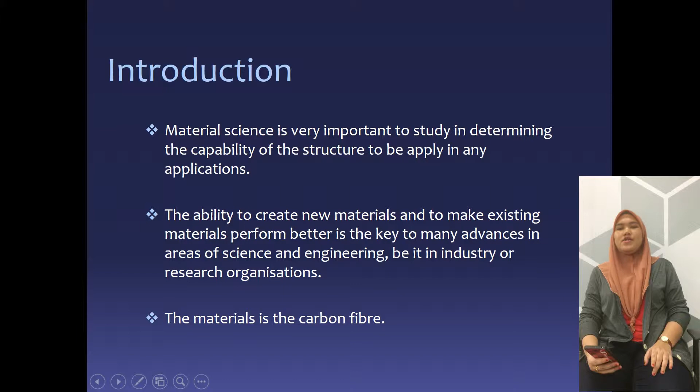For the details on carbon fiber, my friends will explain more about it.

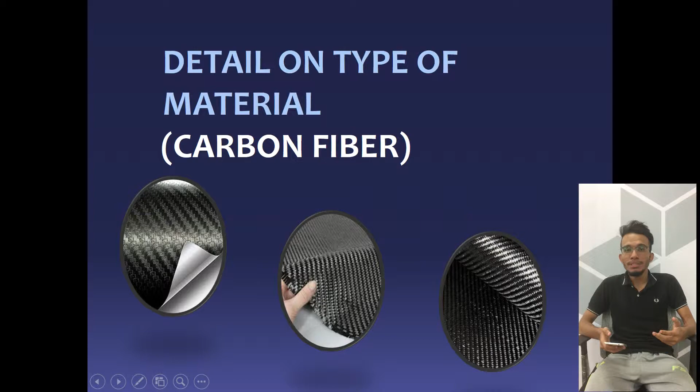Now I will present the details on the type of material, which is carbon fiber.

Firstly, we will look at the composite material. Carbon fiber is a long and thin strand of material in diameter, mostly composed of carbon atoms. The carbon atoms are strongly bound in microscopic crystals that align parallel to the axis of the fiber. This arrangement of atoms makes the fiber strong.

Several thousand carbon fibers are twisted together to form a yarn, which may be used by itself or woven into a fabric. This composite material is produced by combining yarn or fabric with epoxy and winding it into a shape.

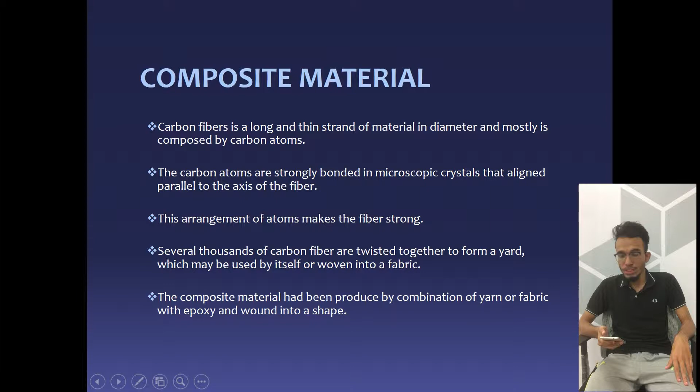There are some applications of carbon fiber reinforced composite material, such as aircraft, spacecraft, racing car bodies, golf club shafts, bicycle frames, fishing rods, automobile springs, sailboat masts, and many other components where lightweight and high strength are needed.

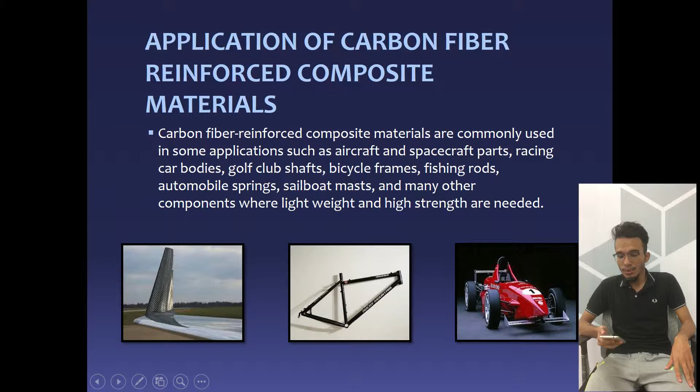Next is the raw material of carbon fiber. Carbon fiber has its own raw material, called the precursor. Polyacrylonitrile is the main material in the composition of making carbon fiber, making up 90% of carbon fiber.

The remaining 10% is made from petroleum pitch or rayon. All of these materials are characterized as long strings of organic polymer molecules that are bonded together by carbon atoms.

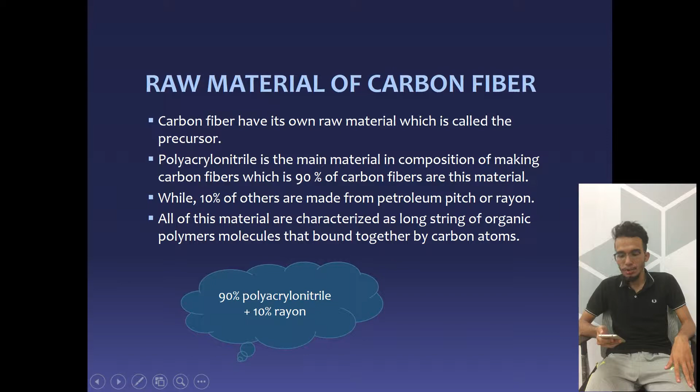Lastly is the manufacturing process of carbon fiber. Chemical and mechanical processes are involved in making carbon fiber. Firstly, the precursor is drawn into long strands. Then it is heated to a very high temperature without any contact with oxygen.

The fiber cannot be burned in the absence of oxygen. Instead, the high temperature causes the carbon atoms in the fiber to vibrate until non-carbon atoms are expelled. Carbonization takes place in this process, leaving a fiber composed of long, tightly interlocked chains of carbon atoms with only a few non-carbon atoms remaining.

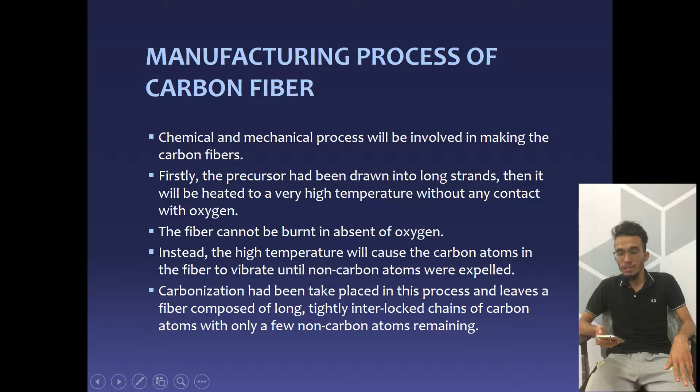The first physical property is that carbon fiber has a high strength to weight ratio, meaning carbon fiber can have good mechanical properties. It can have high resistance to breaking but has low weight. Because of these properties, carbon fiber is suitable for a lot of applications.

One example is suitable for aircraft application. An aircraft needs high strength in order to withstand high pressure and force at high amplitude and high speed, but it also needs low weight in order to reduce cost and reduce the power needed to fly the aircraft.

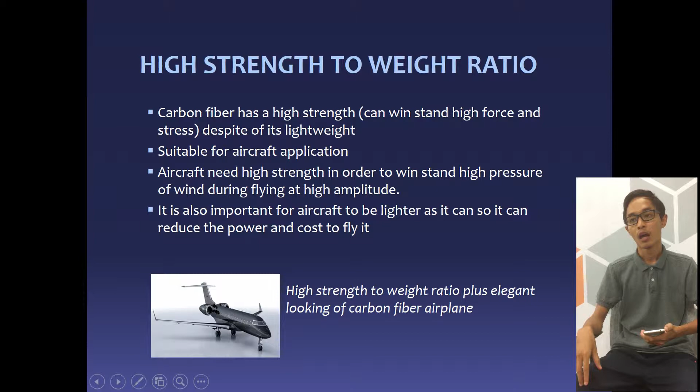The second physical property is that carbon fiber is corrosion resistant and chemically stable, meaning carbon fiber can resist the damage caused by oxidation and chemical reactions.

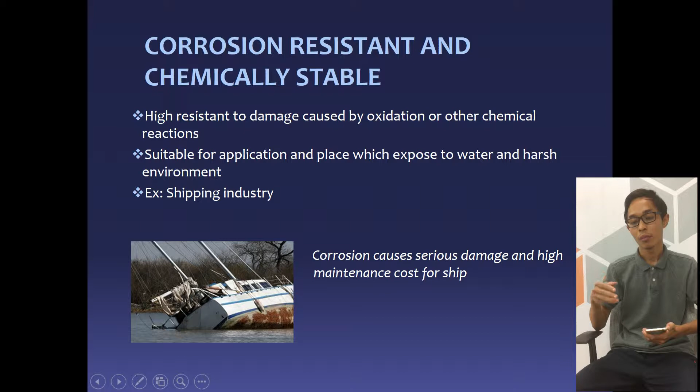Because of this, carbon fiber is suitable for applications exposed to harsh environments and water, such as the shipping industry. In the shipping industry, corrosion causes a lot of maintenance and costs a huge amount.

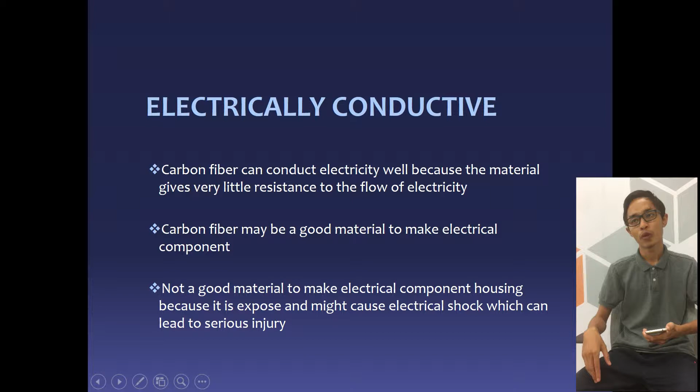The third physical property is that carbon fiber is electrically conductive. Carbon fiber has low resistance when electricity flows, and because of this, carbon fiber is suitable for producing electrical components.

Next, carbon fiber is a fire resistant material. Carbon fiber may be oxidized if exposed to high heat in the presence of fuel burning, but the flame does not continue once the flame and fuel are removed.

With this heat fire resistance, carbon fiber is suitable for applications exposed to fire, such as products used in the kitchen and firefighter equipment.

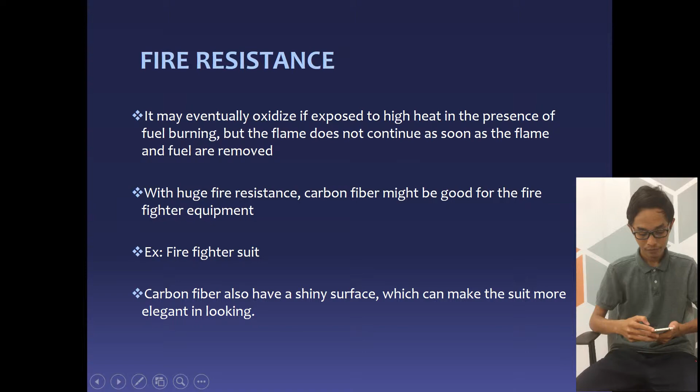Next, carbon fiber has a low coefficient of thermal expansion. Thermal expansion is a measure of the extent to which a material expands or contracts when exposed to high or low temperature. Because of this, carbon fiber is suitable for applications that are critical to small movement, such as optical machinery like telescopes and microscopes.

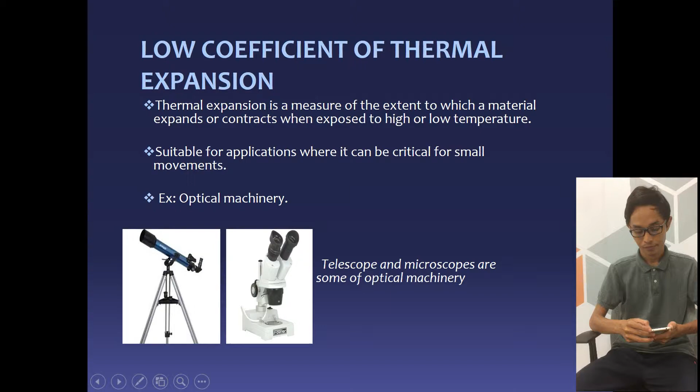The last one is carbon fiber is non-poisonous. Because of this, carbon fiber is suitable for applications in medicine. For example, in broken bone cases, usually metal is used in order to support the part that is broken.

But metal has high risk because metal can corrode and give chemical reactions that may harm the human. Carbon fiber, however, is non-poisonous, lightweight, and highly corrosion resistant, making it a perfect alternative to solve this problem.

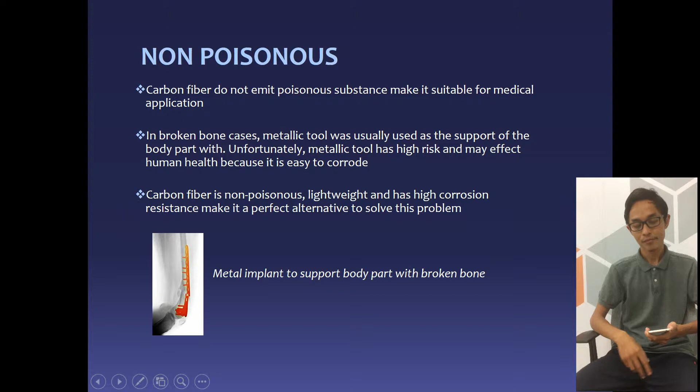As you see on the left hand side, the figure shows the illustration of the layer structure of carbon fiber. The layer structure consists of 6 layers, and in each layer, carbon bundles are arranged in 0 and 90 degree directions, woven together.

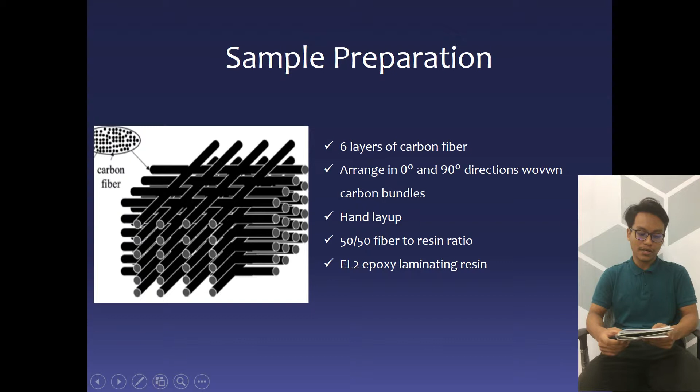The composition of resin matrix and fiber ratio is 50%, and the resin matrix used in this fabrication process is EL2 epoxy laminating resin. Hand layup is used for this fabrication process.

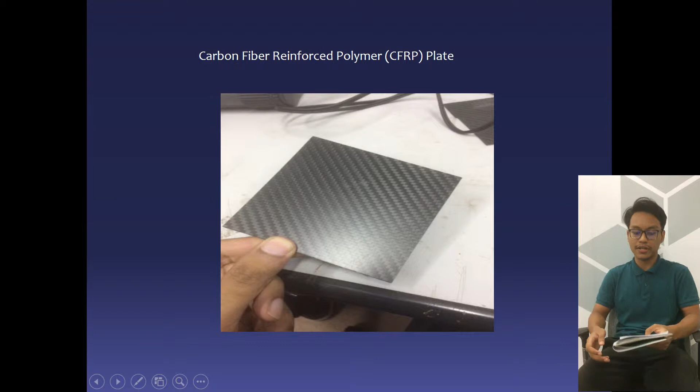Next, this figure shows the sample preparation for the tensile test. The overall length of the sample is 250 mm, the width is 25 mm, and the thickness is 1.5 mm.

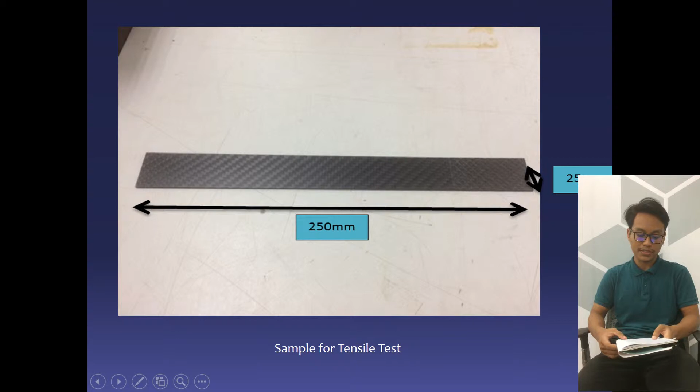There are 5 samples that had been prepared before performing the tensile test, to get a mean average value more accurately.

Next, this is the figure of the tensile test machine that we use to determine the mechanical properties of the carbon fiber.

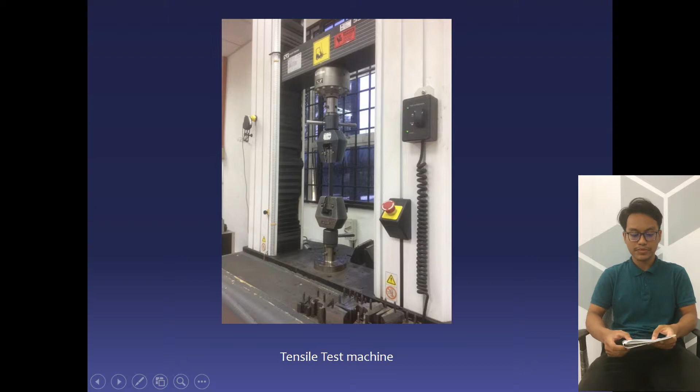Next, this is the graph of load versus extension that we get from the tensile test. As we can see, the maximum load that carbon fiber can withstand is about 30000 Newton and above.

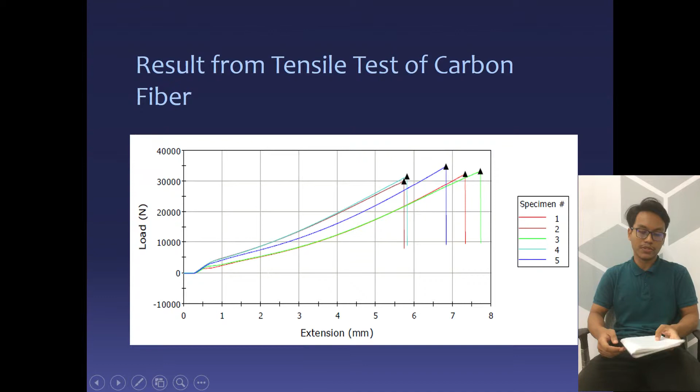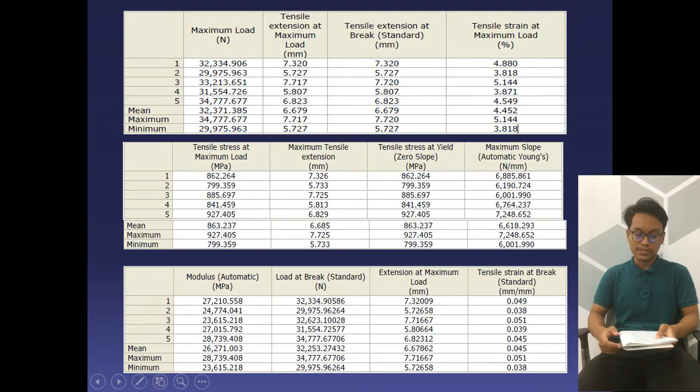Next, this table also shows the overall data that we obtained from the tensile test, such as tensile stress at maximum load and modulus of elasticity of the sample.

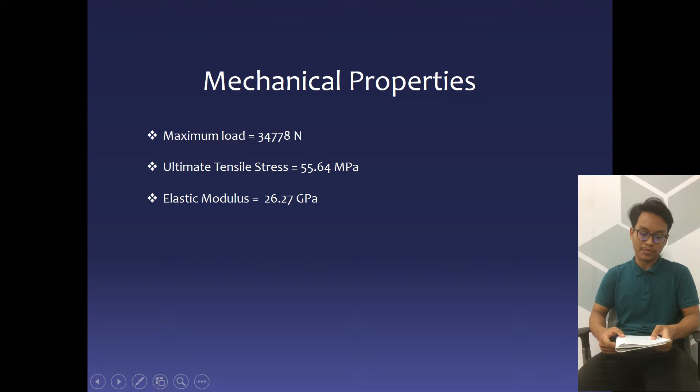In the end of this experiment, we have calculated the value of the maximum load is about 34,778 Newton, 55.64 megapascal for ultimate tensile strength, and 26.27 gigapascal for modulus of elasticity.

Lastly, this is the microstructure of the carbon fiber that have been captured from SEM. That's all from me, thank you.

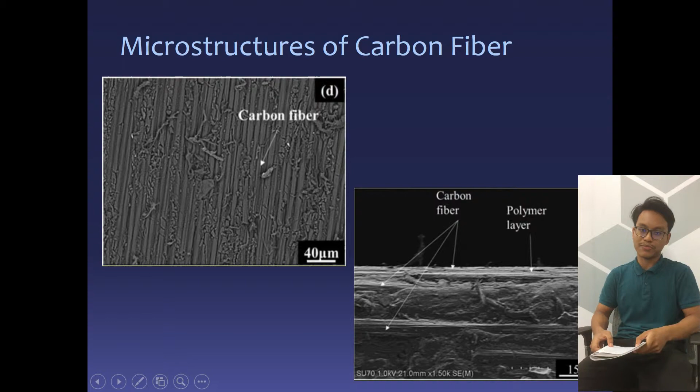Firstly, we must know the raw material of carbon fiber. Carbon fiber is made up of organic polymer. It is made up of a long chain bonding of carbon atoms.

Carbon fiber contains two parts, which are the matrix part and reinforcement part. The reinforcement part is the carbon itself, and the matrix part comes from nylon, epoxy, or polyester.

Most carbon fiber is made up through the polyacrylonitrile process. Other than that, it may come from rayon or petroleum pitch process.

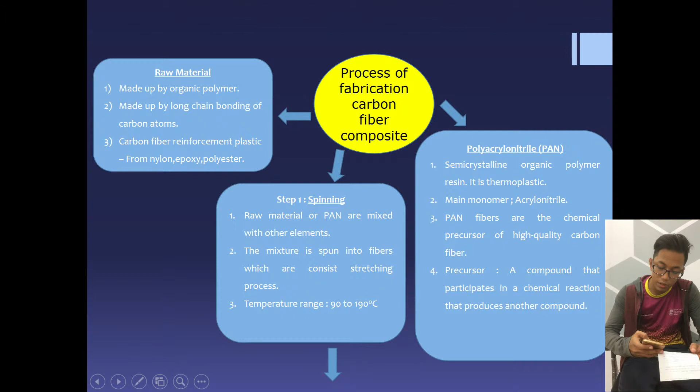The PAN process uses a semi-crystalline organic polymer resin. It is thermoplastic, and its monomer is acrylonitrile. PAN fibers are the chemical precursor of high-quality carbon fiber.

What is a precursor? A precursor is a compound that participates in a chemical reaction that produces another compound. There are 5 basic processes in order to fabricate carbon fiber.

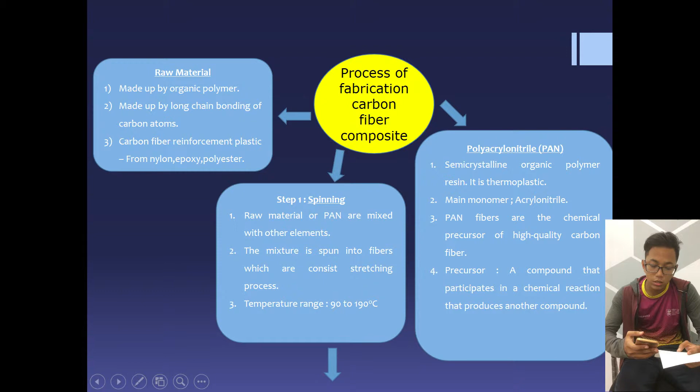For step 1, spinning: the raw material, or PAN, is mixed with other elements. The mixture is spun into fibers, which involves a stretching process. The temperature range is from 90 to 190 degrees Celsius.

Next, for step 2, which is stabilizing: it is a chemical alteration or oxidative stabilization. The purpose is to stabilize the bonding chain.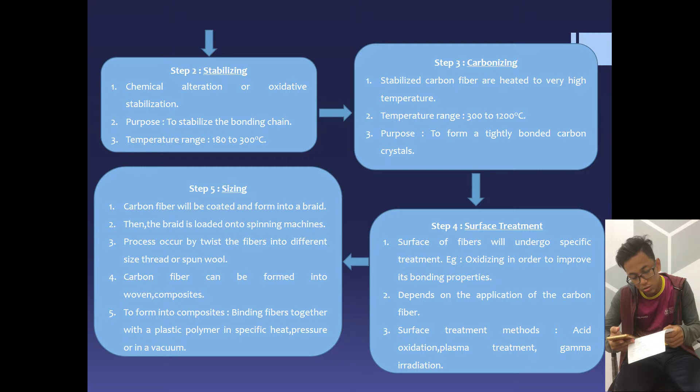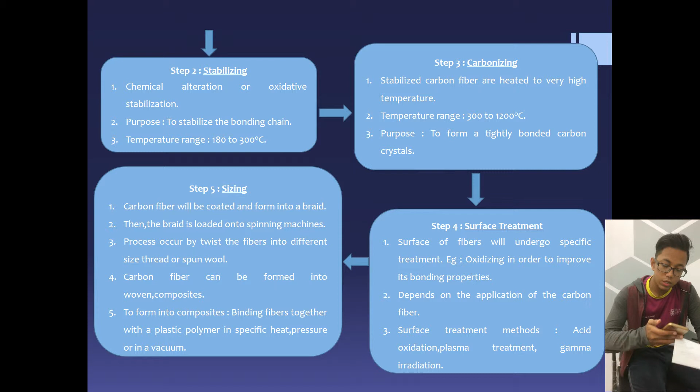For step 3, which is carbonizing, the stabilized carbon fiber is heated to very high temperature, ranging from 300 to 1200 degrees Celsius. The purpose is to form tightly bonded carbon crystals.

Next is step 4, which is surface treatment. The surface of the fiber will undergo specific treatment, for example oxidizing, in order to improve its bonding properties. The surface treatment depends on the application of the carbon fiber.

There are other methods that can be used in the surface treatment process, which are acid oxidation, plasma treatment, or gamma irradiation.

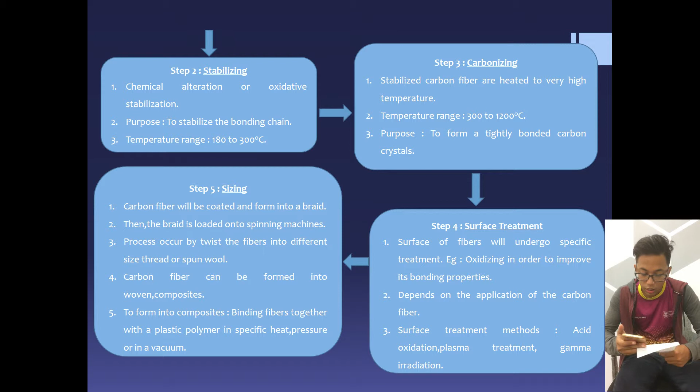Lastly, step 5, sizing. Sizing starts with the carbon fiber being coated and formed into a braid.

Then the braid is loaded onto spinning machines. The process occurs by twisting the fibers into different size threads or spun wool.

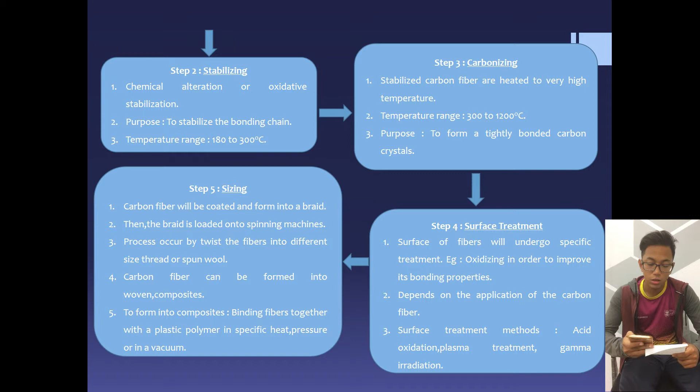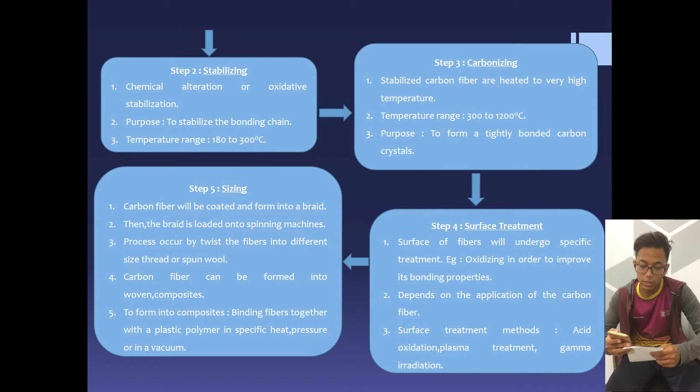Carbon fiber can be formed into woven or composite form. To form a composite, the fibers are bound together with a plastic polymer under specific heat, pressure, and vacuum.

Next, the application of carbon fiber. These are the common industries where carbon fiber is widely used, which are automobiles, aerospace, and sport industries.

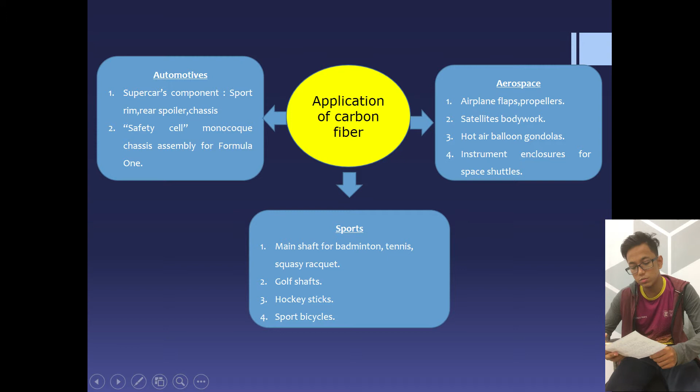Furthermore, carbon fiber can withstand high pressure conditions, so it can be used in the aerospace industry, such as propeller manufacturing, airplane flaps, and instrument enclosures for space shuttles.

Last but not least, carbon fiber can be used in the sport industry. For example, with the use of carbon fiber for the main shaft of a badminton racket, a player can perform at his peak without getting tired early due to the lightweight of the racket.

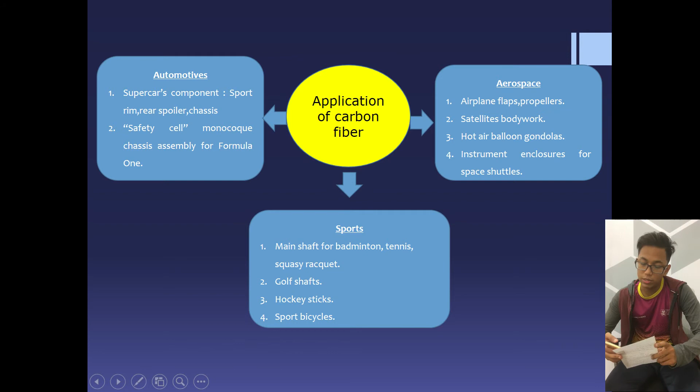There are many more applications of carbon fiber in the sport industry, such as main golf shafts, hockey sticks, and sport bicycles. That's all from me, thank you.

As the conclusion, from the information that my friends have given, we can decide that carbon fiber has good and unique characteristics and has huge potential in the future, and it may help develop human life better. It can also be used in a lot of applications in future engineering.